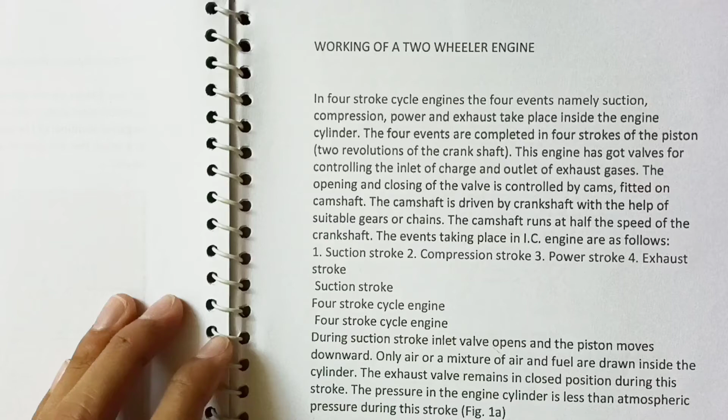Working of a two-wheeler engine. In four-stroke cycle engines, the four events namely suction, compression, power and exhaust take place inside the engine cylinder. The four events are completed in four strokes of the piston, that is, two revolutions of the crankshaft.

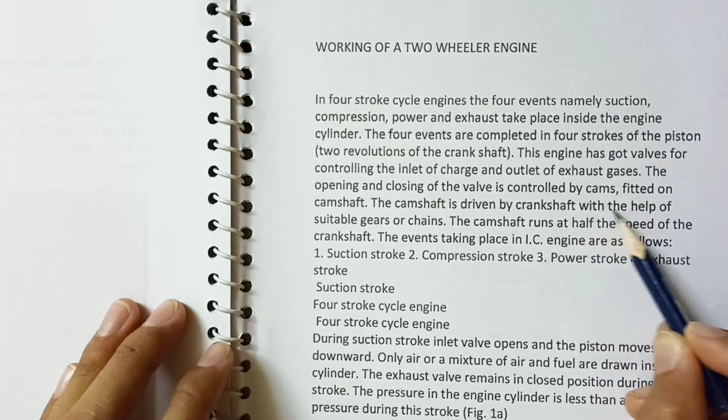This engine has got valves for controlling the inlet of charge and outlet of exhaust gases. The opening and closing of the valve is controlled by cams fitted on camshaft. The camshaft is driven by crankshaft with the help of suitable gears or chains.

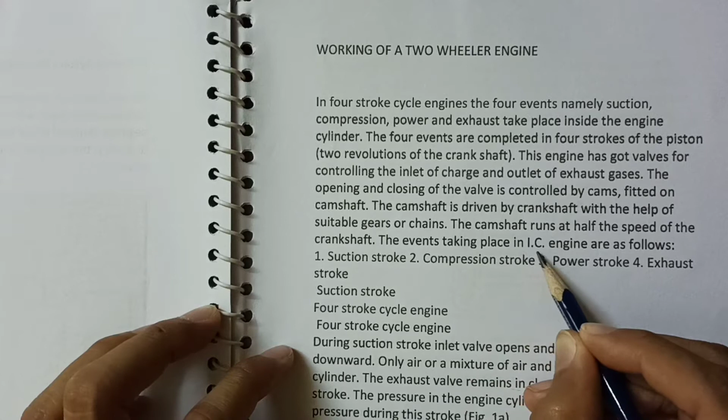The camshaft is driven by the crankshaft with the help of suitable gears or chains. The camshaft runs at half the speed of the crankshaft. The events taking place in IC engine are as follows. Number 1, suction stroke. Number 2, compression stroke. Number 3, power stroke. Number 4, exhaust stroke.

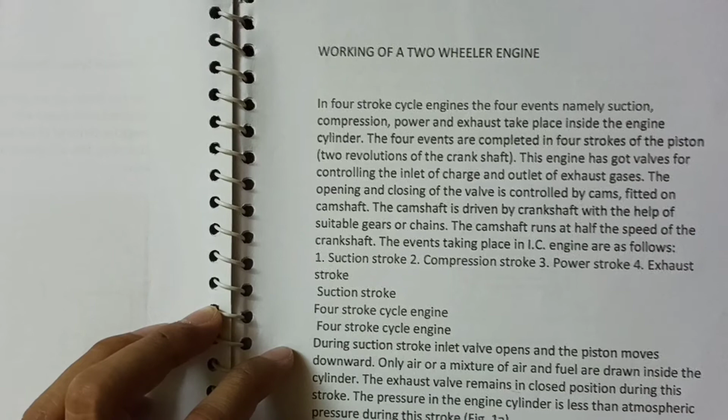Suction stroke. During suction stroke, inlet valve opens and the piston moves downward. Only air or a mixture of air and fuel are drawn inside the cylinder. The exhaust valve remains in closed position during this stroke. The pressure in the engine cylinder is less than atmospheric pressure during this stroke.

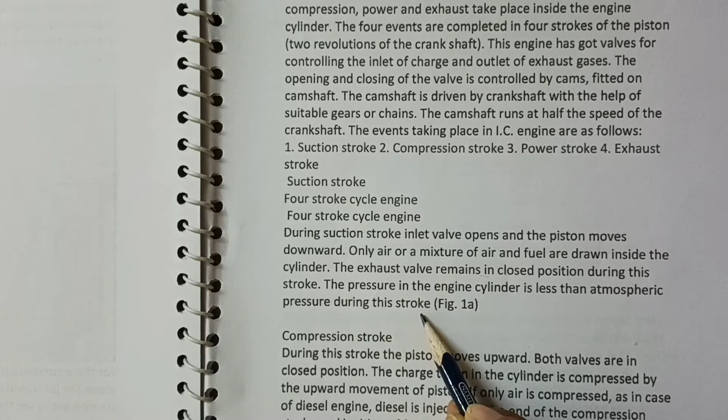We can see in the figure 1a. That is this one, suction stroke. Inlet valve is open.

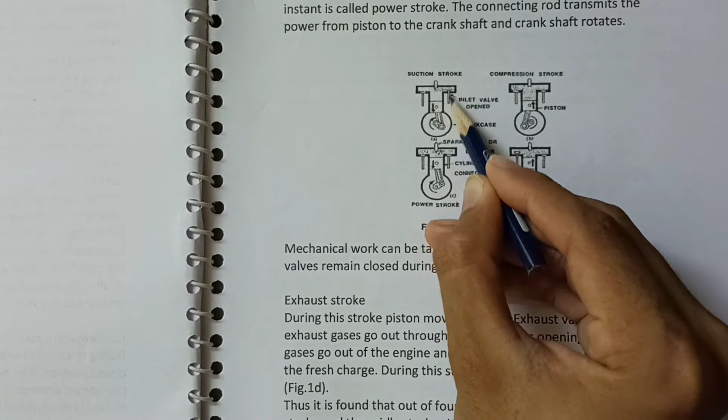Compression stroke. During this stroke, the piston moves upward. Both valves are in closed position. The charge taken in the cylinder is compressed by the upward movement of the piston. If only air is compressed, as in case of diesel engine, diesel is injected at the end of compression stroke and ignition of fuel takes place due to high pressure and temperature of the compressed air.

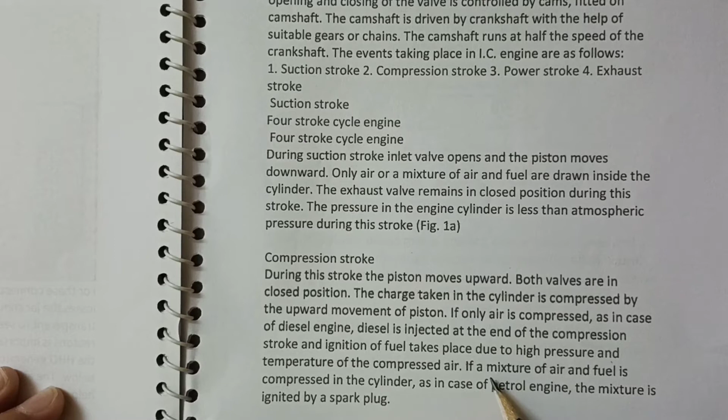If a mixture of air and fuel is compressed in the cylinder, as in case of petrol engine, the mixture is ignited by a spark plug.

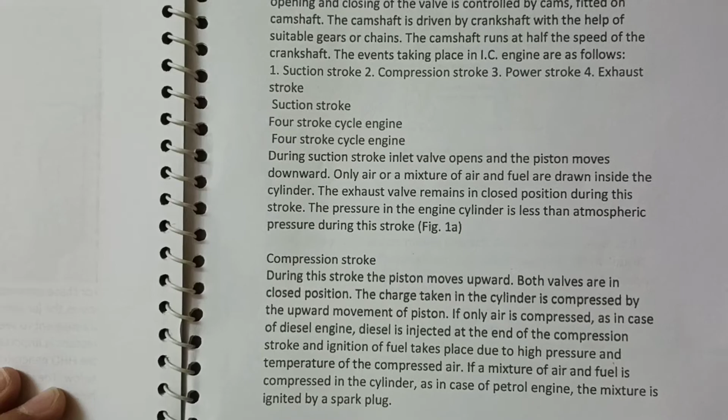Power stroke. After ignition of fuel, tremendous amount of heat is generated, causing very high pressure in the cylinder, which pushes the piston downward. We can see in the figure C. This is figure C actually. The downward movement of the piston at this instant is called the power stroke.

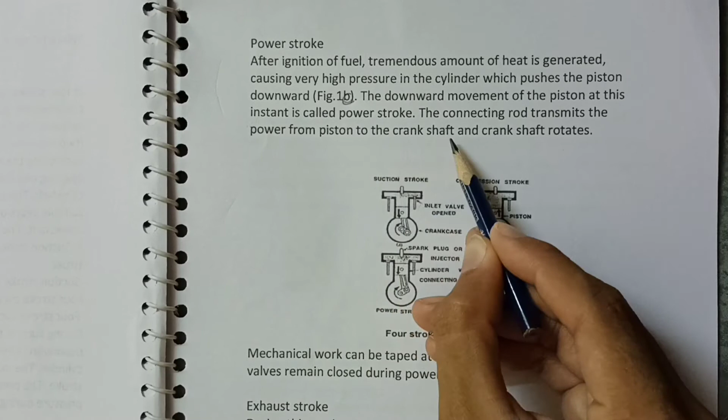The connecting rod transmits the power from piston to the crankshaft and crankshaft rotates. We can see in the figure. Mechanical work can be tapped at the rotating crankshaft. Both valves remain closed during power stroke. We can see here, both the valves are in closed position.

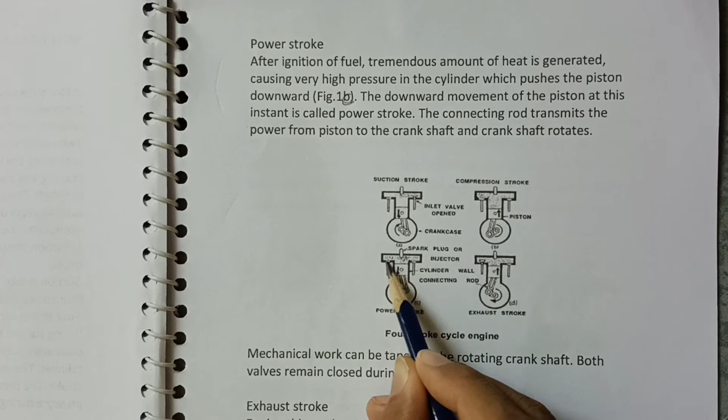Exhaust stroke. During this stroke, piston moves upward, exhaust valve opens and exhaust gases go out through exhaust valve opening. All the burnt gases go out of the engine and the cylinder becomes ready to receive the fresh charge. During the stroke, inlet valve remains closed.

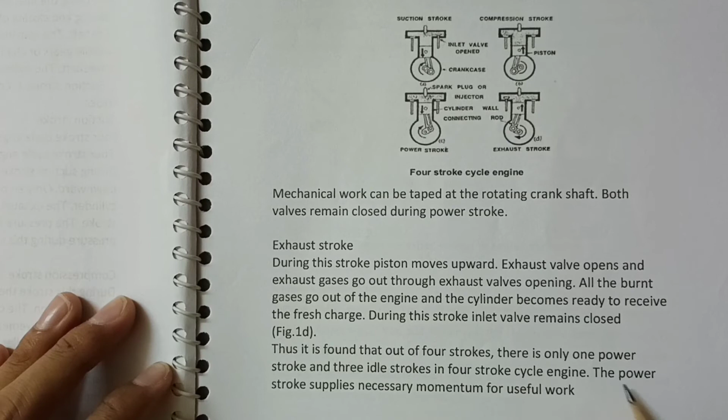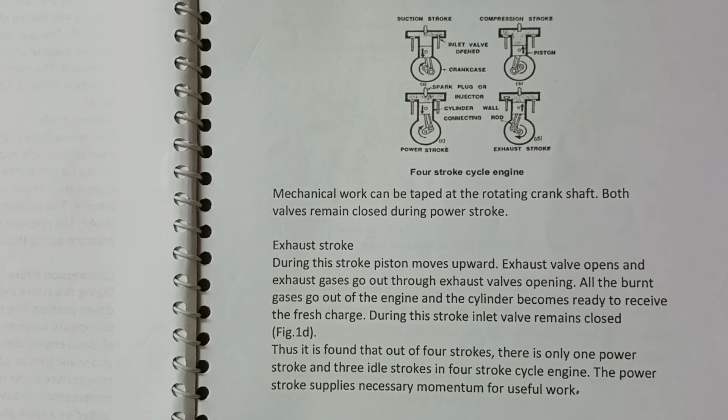Thus, it is found that out of 4 strokes, there is only 1 power stroke and 3 idle strokes in 4-stroke cycle engine. The power stroke supplies necessary momentum for useful work. Thus, in this video, we have learnt about the working of a four-stroke IC engine.